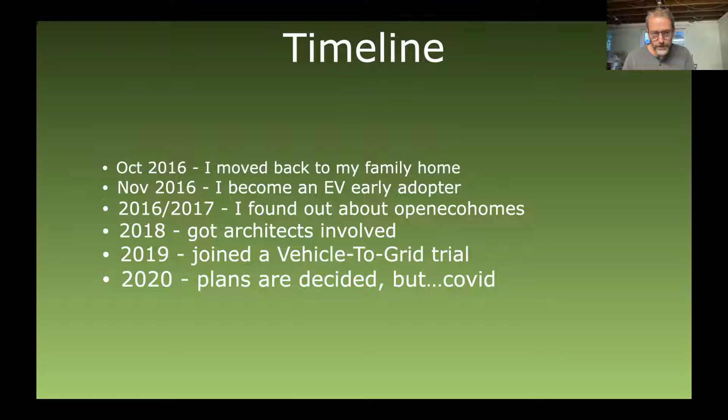By 2020, the plans are pretty finalised and the main eco and energy efficiency measures are decided upon. Then the world imploded with COVID. But having already planned the eco and energy efficiency measures, I was able to make use of the Green Homes Grant before it ended in 2021 in getting my pitched roof insulated with spray foam.

Having gone through the planning stages, I knew that it could be done independently of any of the other measures. So it was great to have that knowledge in place and knowing what I could move on and what I really couldn't. And equally, when the Solar Together group put a group purchasing leaflet through the door, again, I knew I could proceed with that. And with Solar Together, I reckon I got close to a 50% discount on the standard prices for solar.

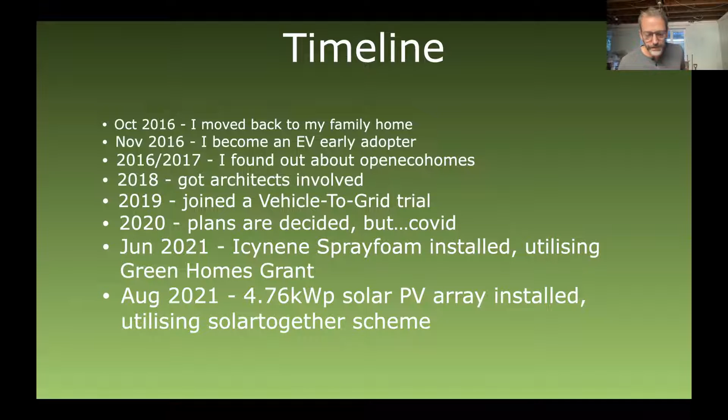And again, December 2021, when the government announced the end of the Renewable Heat Incentive, I decided to push for an install before that scheme ended, as replacement schemes generally are never as good. At that time, the Boiler Upgrade Scheme had not yet been announced. But it turned out I was right. The next scheme wasn't quite as good.

But pushing for an early install when there were supply chain issues with all of the COVID problems wasn't such a great idea. And at that time, my knowledge of heat pumps wasn't great.

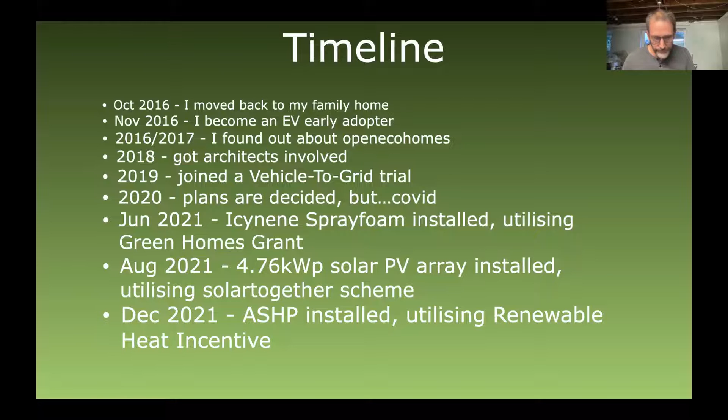Then, end of the lockdown, cometh the man, this time my builder buddy, saying that he was available to start on the project. And it was just absolutely perfect timing, being the end of spring, start of summer, just the perfect time of year. We couldn't have asked for a better gift.

And 5 months into the project now, I think he's pretty much still a buddy, thanks to him making a lot of allowances almost daily and very much tolerating myself and my mum. 5 months might sound like quite a long time, but we did encounter a lot of problems upstairs, and he's only been working 4 days a week with a minimal crew, which has really been just the right pace for mum to cope with the changes that are taking place, and a house not being overrun with builders, because we decided, well, I decided that moving out would not be the best option for her. It would be harder for her to cope with everything going on if she was away from her house, and especially away from her garden.

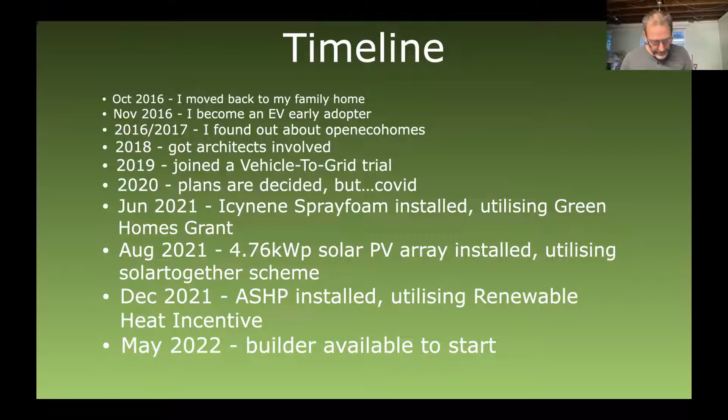So there are 3 main aims or main objectives to my project, which I'll describe in more detail with a section of the talk on each of them. The first one being considered quality of living design, being eco-friendly and energy efficient.

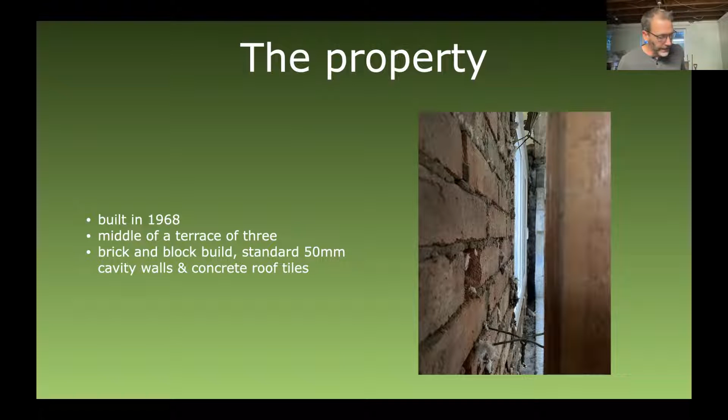So the property is a standard brick and block build with 50mm cavities, and you can just see in the cavity between the walls some of the blown fibre insulation that went into the cavity walls about 10 years ago. The existing layout now with the front extension was designed as a starter family home with 2 double bedrooms, 2 single bedrooms, and a kitchen with the obligatory serving hatch through to the living/dining area. My parents added the front extension in the 70s to add a downstairs toilet, dining room, and creating a double length garage that you can't even drive a small family car into these days. Of note is the passageway here on the right of the ground floor, because that's our only access through to the back garden.

So changing the layout I had to take into some considerations for mum, as elements of the living room downstairs and definitely her bedroom upstairs needed to remain unchanged to keep an element of familiarity, grounding her and really keeping alive the links to the building that she's spent her life in and raised a family in. So downstairs, the passageway through from the front to the rear gardens had to stay, the living room area, and keeping a front part of the garage for storage, and then upstairs, her bedroom.

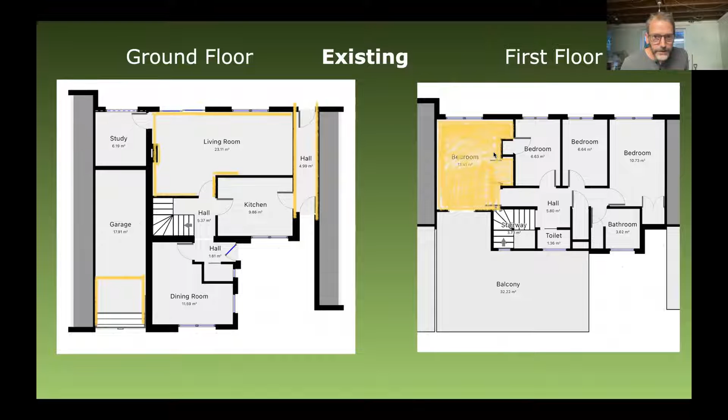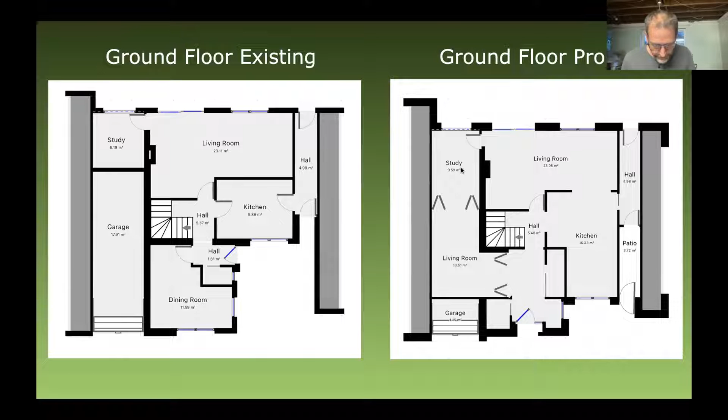So for the changes, the front door was moved to the front of the property, which seemed like a smart idea. I've extended the kitchen slightly. The dining and the garage were combined to create a new social area for myself, and we expanded the downstairs toilet to become a downstairs bathroom, with an area of the new social area that could be used as a downstairs bedroom with a view out into the garden, should either of us become unable to use the stairs.

Upstairs, we combined the 2 single bedrooms into a double bedroom, and I borrowed some of that space for the bedroom to the right, as the wardrobe in that room was used to house the air source heat pump's internal gubbins and the water cylinder. The bathroom has been pretty much doubled in size by knocking through what was a laundry cupboard and a separate shower room. So that's been quite a major change to the bathroom.

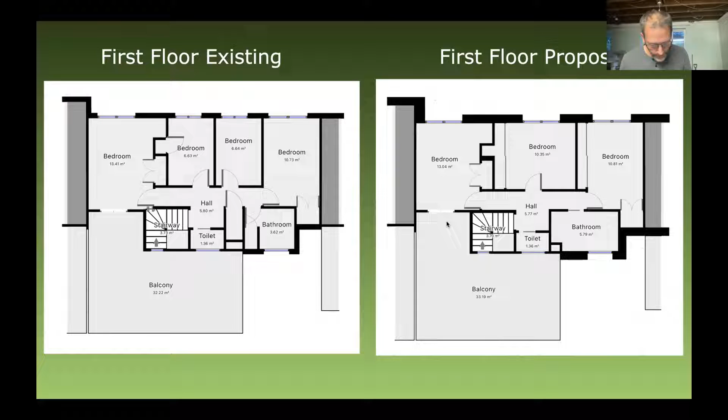The first project aim, considered quality of living design, might sound impressive, but it's a phrase I composed with the help of a thesaurus. Then the following day, I saw it in a magazine and realised that I'd probably seen it before somewhere, so I can't take any credit for that.

Basically, what I was trying to get with the phrase is making the house easier and safer for us to live in, taking in some elements of universal living, which is making it full wheelchair access. We can't do that, but we've kept wheelchair access in mind, and also dementia awareness, which includes recommendations such as keeping recognisable features of the house and belongings, pronounced skirting boards, so you can easily see where the wall and the floor join, and trying to avoid any changes from light to dark flooring, say with a very dark doormat on a light floor, because to somebody with dementia it can appear as a hole and can be quite frightening for them.

Also with the front door, making it same level access and providing a bench or shelf inside and outside the front door for putting bags down on, and creating a covered porch area so you don't get soaked while searching for a key, a toilet within easy reach of the front door, and certain elements of the house can be automated, such as door unlocking and lights turning on automatically.

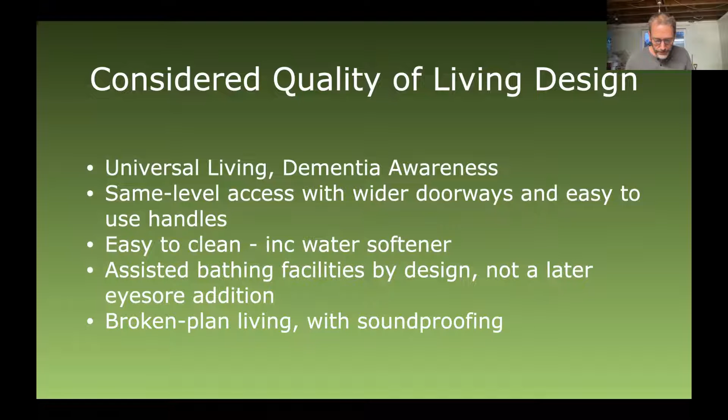Broken plan living with soundproofing. So some areas can be shut off by folding and sliding doors, and using soft materials to dampen sound as well. Okay, air quality, ventilation, and lower VOCs, volatile organic compounds. They have less if you use natural products.

Comfortable environment. As we both spend the majority of the day at home, an air source heat pump by design creates a comfortable environment by running all day, instead of gas heating that only comes on twice a day. Now, most people would think that external wall insulation is to insulate in the winter, but it also does the same job in the summer, providing cooler shelter from the oppressive heat we've been and will continue to experience.

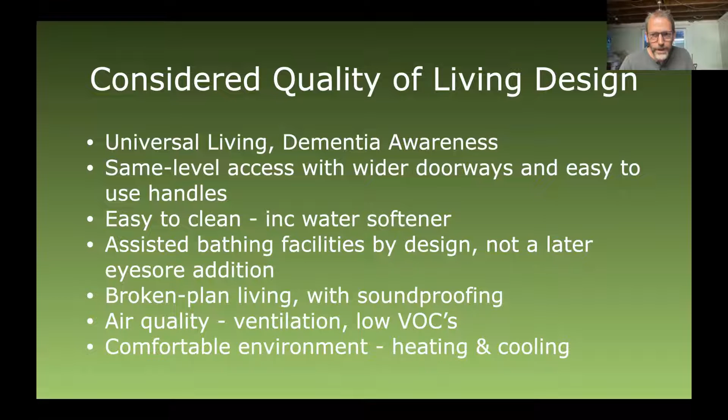And perhaps the best way to sum this up is to show you all a video of the not quite finished bathroom. And hopefully I can get this to run. So there's a pocket door to create the room with an easy to use lock, which was quite hard to find. Our washing machine has been temporarily plumbed into where, hopefully for health benefits, we can put an infrared sauna if there's some money left over in the budget.

Well, we seem to have lost the video. Because it's lost the video.

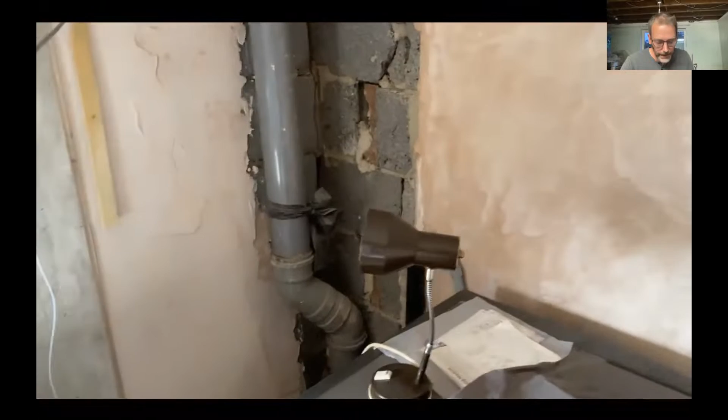Okay. So the corner section by the waste pipe that's coming up is an area that's going to be boxed off and will house the extract unit for all of the wet rooms. There's coming up a sink without a ridge so that it's easy to put things down, an ergonomic tap so that it's comfortable to use and easy to clean behind, which isn't a feature of our previous sinks.

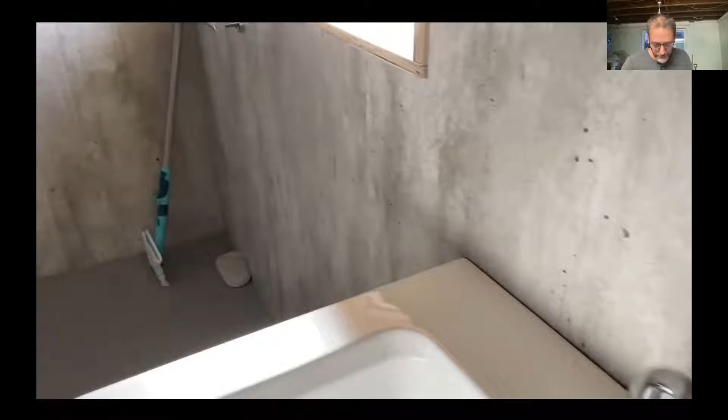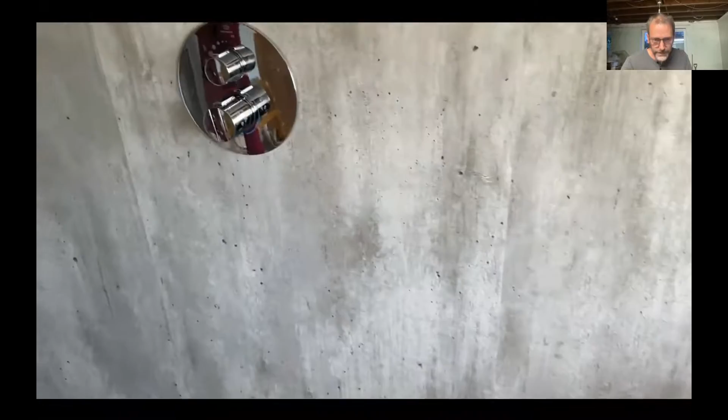The floor is Marmoleum, which is waterproof, comfortable, soft and warm. There's a grab rail cunningly disguised as a towel rail. The walls are covered in Mermaid boards, which are easy to clean and have no grubby grout. Again, an ergonomic tap without any prongs sticking out and situated so that you can turn the shower on without getting wet and getting that blast of cold water.

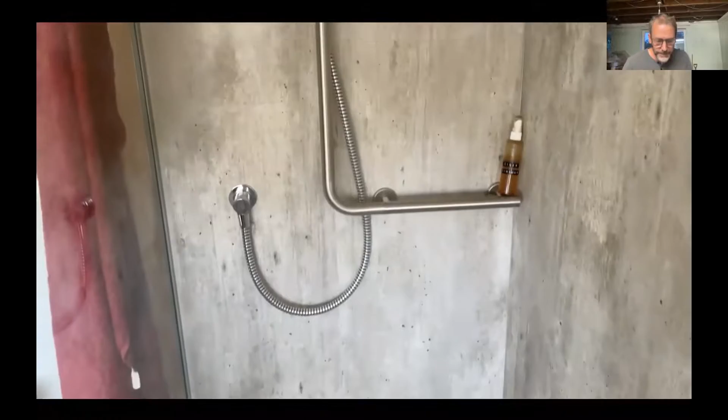And this is the 75% water saving shower head. It creates a drenching warm mist of water. So it's like a waterfall or rainforest shower, but without the associated environmental and financial costs. And as air source heat pumps aren't great as towel warmers, we also have an infrared heated towel rail, which got joined up to the electric circuit yesterday. So we've now got a warmer bathroom in the mornings.

I don't think we can see that. No, that's fine. Video has come to an end. Yeah. Right. It's the white panel, very bland at the moment. So on to the next slide.

Yep. So the second project aim was to be as eco-friendly as possible within our budget. What you may notice is that there are some elements of each aim that could be in any one of them. My original idea was not to extend at all, but we hadn't considered that our neighbours might want to build a 2-storey wraparound extension to the side and back, cutting off some of our light. So back to the drawing board and a bit more money on architects. And this is when I got AC Architects on board.

Using natural materials where possible, like cork and clay, and EWI, which stands for external wall insulation, which I'll go into more detail on in the third project aim.

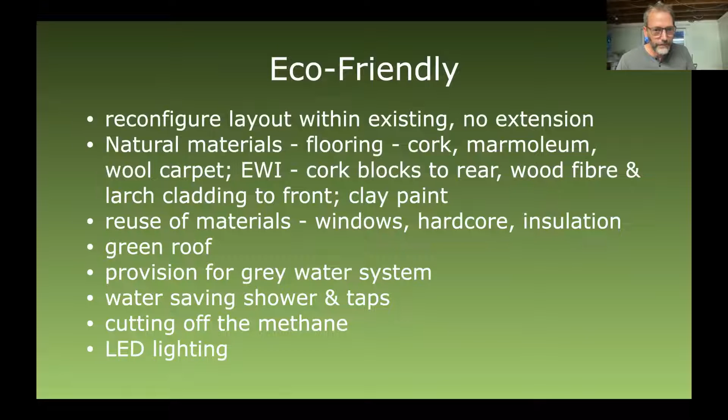10th of October, we are cutting off the methane, the so-called natural gas. That's going to be a very memorable day for me. Another eco-friendly thing, we're putting LED lighting throughout.

Now, with any eco or green measures, they will generally cost you more. So we had to compromise to keep within our budget. When you compromise, if what you choose instead doesn't match your ideals and values, then you're never going to be happy with it. It's just going to be a constant nagging reminder. And so always stick to your ideals and values. And it's a rule that you can apply to your job as well, I hear.

So here, as with this example, clay plaster, it's only twice the price of gypsum plaster, but the shipping costs just make it well out of our reach. So we opted for clay paint instead. So it has the same properties, but just in a much thinner layer.

Another compromise was the green roof. There are a number of different types of green roof. The one which replicates a ground level garden will obviously need a lot of structural support to be put in. So we chose to go with a cheaper sedum carpet, which also has the minimal maintenance to go with it.

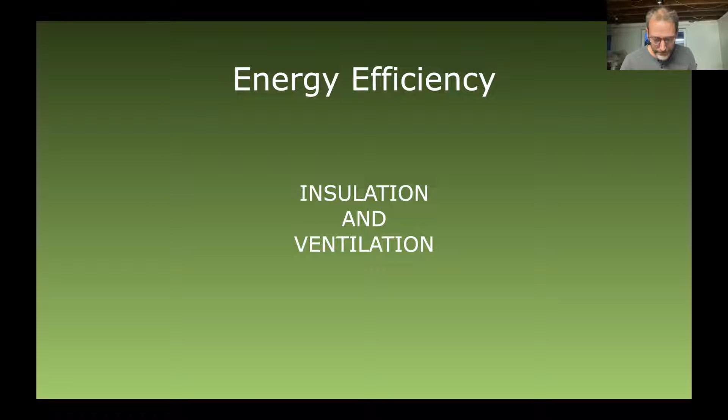So moving on to energy efficiency, the third and funnest of the project aims, where those who've been disappointed so far by a distinct lack of graphs will be rewarded with some. The main thing that I've learned from Open Eco Homes is that the two main considerations when altering your building are insulation and ventilation. Get these wrong and you can damage the fabric of your building. They're so important. They should be underlined in bold and in a red font color.

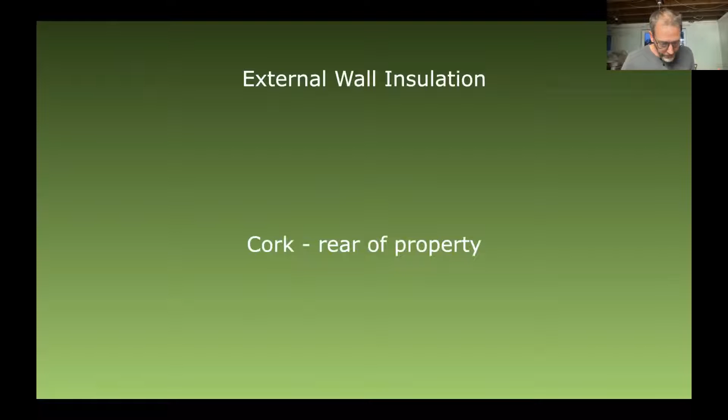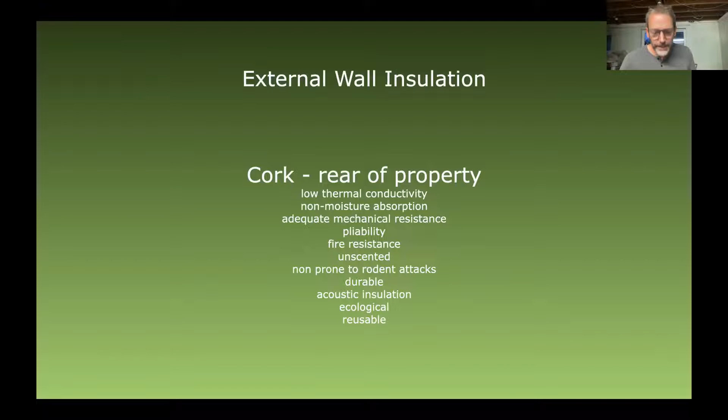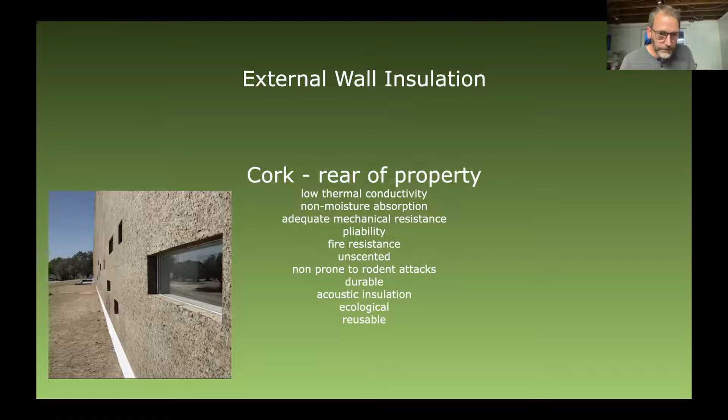So external wall insulation. I chose cork for the rear of the property because of its many properties, not least that it's a natural product and reusable. And I really like the look of it as well. It's available in a range of looks. The plain flat surface is what I like best. And it does retain that kind of natural color. Mostly there's a little bit of fading over the years, but not a drastic amount. And as well as the flat front, it's also available in a number of different patterns that they can cut into it as well.

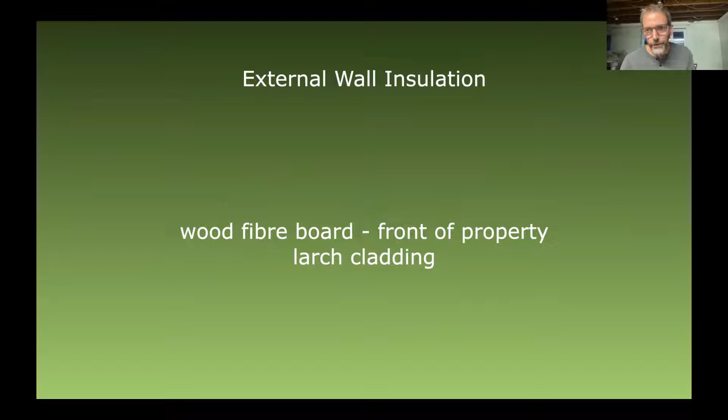For the front of the house, wood fibre board, again, a very eco-friendly natural product, covered with larch cladding, as I thought the planning department might struggle a bit with having cork on the front of the house as well. And again, I'm compromising here by going with Scottish larch as opposed to Siberian. It's generally considered not quite as good a quality. It's got more knots in it, but they add character, and it's got the same properties as the Siberian, but Siberian is generally ranked as better and longer lasting, but you're paying the price for that.

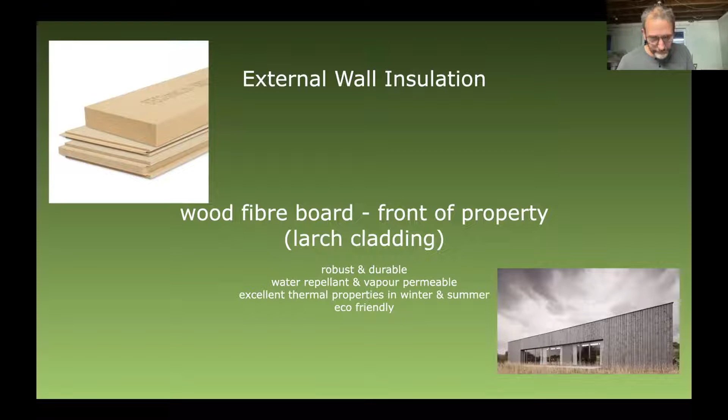So as I mentioned before, we're pulling the windows out to fit them into this new external wall insulation layer, as that will give them the best energy efficiency. The glazier that fitted them originally has come back and worked out a system with my builder that he was happy with, so that we could still keep the FENSA certification valid.

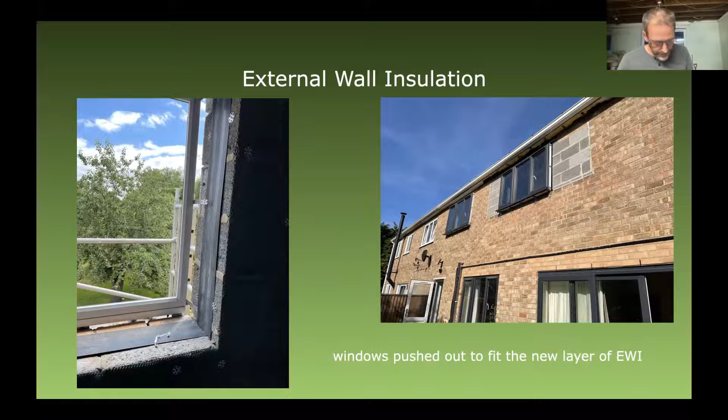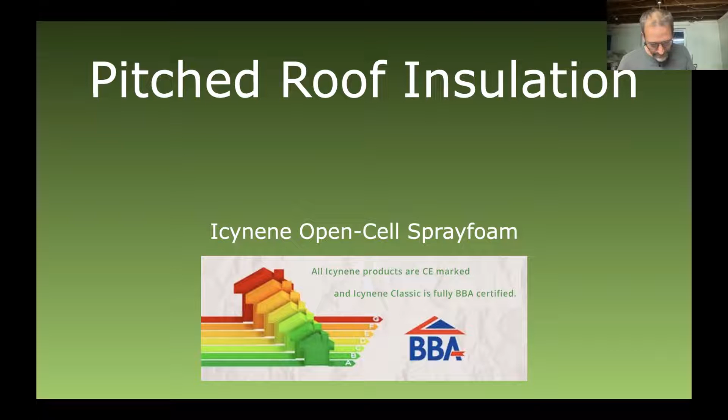breathable format. Mortgage providers don't like it because you can't see the health of the building fabric behind it, but you could say that the same goes for plaster and other insulation layers, and a quick lick of paint can hide many problems. So we got it through the Green Homes grant,

and so the government paid for it, but when it came time for having an energy performance certificate done, the chap doing that said that there isn't a box to tick for it, so it's not being calculated into your EPC. So even though the government was willing to pay for it, they can't account for it.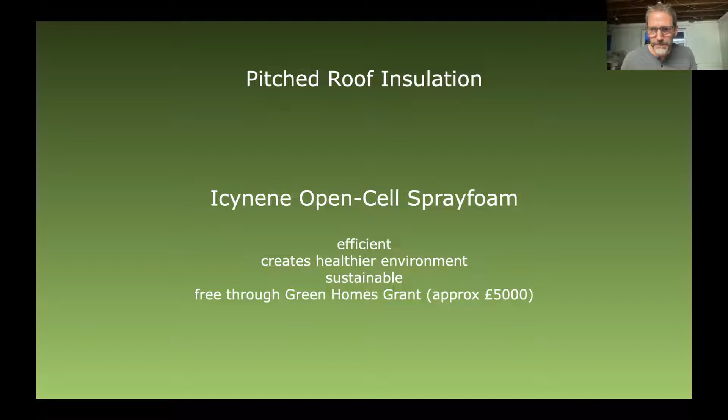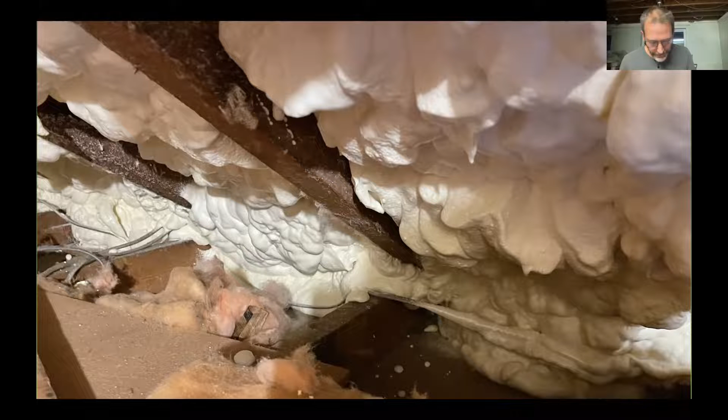But getting it through the grant probably explains why the quality of the install does leave a lot to be desired. There are kind of gaps in there, so it's not a consistent layer. It could have been applied a lot better, but it's up in the loft, and it's difficult for either of us to get up there and kind of check out the job that was done.

But with sensors up in the loft space, it's shown that the humidity and temperature has remained relatively constant. In July 2021, we had a heat wave, and that accounts for the spike in the temperature here. This year, when we had the solar panels providing the roof with shade, it was much cooler, but the sensors weren't in place due to the building work.

In the colder month of January of this year, the levels remained more constant, even though at the time our then shower room was expelling the warm, moist air directly into the loft cavity. So there were daily mini spikes, but overall, as you can see here, the open cell spray foam has worked, and it's keeping it at a very good level of humidity, quite often lower than the rest of the house.

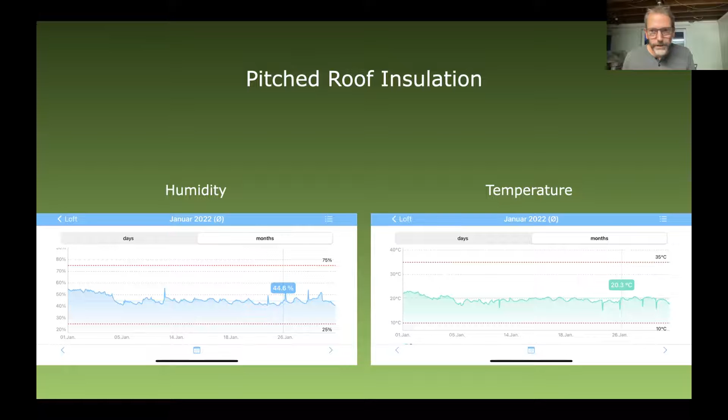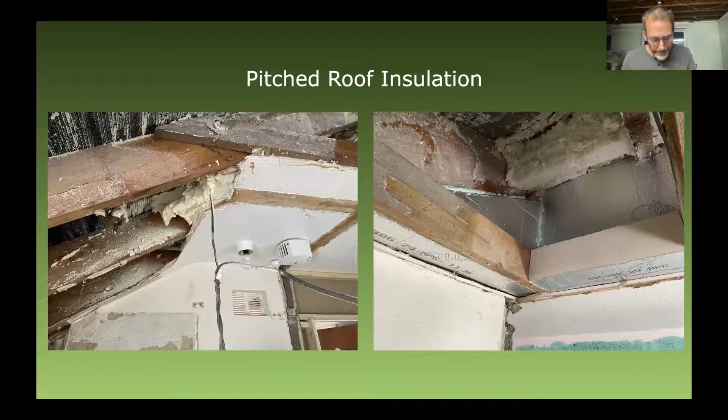With the spray foam, when it came to insulating the newly configured bathroom area, we had to create a junction between the warm roof that we'd created of the loft space and the cold roof of the bathroom, which has the skeeling, which is the slant, where the roof becomes part of the ceiling of the room. So warm and cold roofs. So the architect and the builder came up with the system to allow for combining the two and allowing for ventilation of the cold roof.

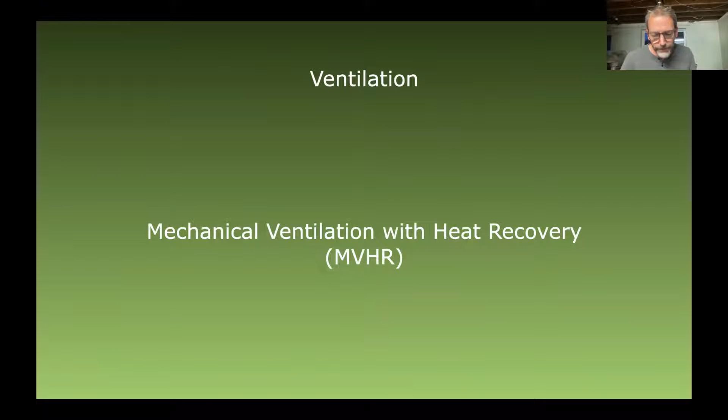The ventilation, the other main aspect of the insulation and ventilation that Open Eco Homes advise. Mechanical ventilation with heat recovery is by far the best option, and I would have had it if I could, but it's costly and requires ducting to most rooms, which is really quite invasive. And so luckily, Open Eco Homes produced a video in a recent year about an Aereco product for mechanical extract ventilation or demand control ventilation.

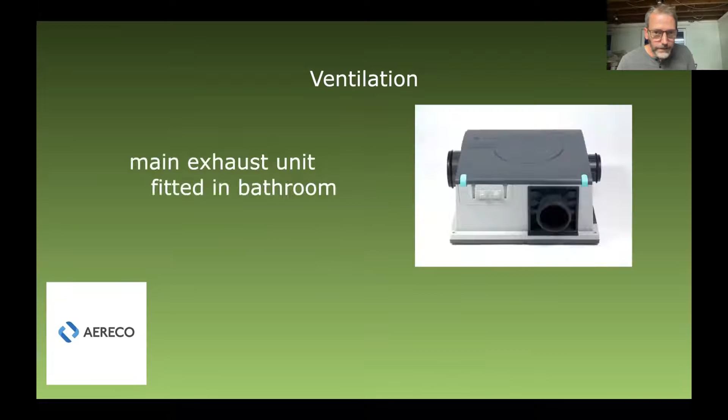So there's just a few pictures that I'd prepared of all the bits you get. So with solar, photovoltaic solar panels, I went through the Solar Together scheme, which was a very good option for bulk buying as a group, where you get the good discounts. And they also allowed you to purchase batteries at the same time.

And if anyone is thinking of installing solar, I always emphasize that you get your money back through storing the electricity and using it yourself, generally not through exporting. And as we move to more time of use tariffs, this becomes ever more important and effective at reducing our energy bills. Now, as I already had a battery on wheels, I didn't consider that getting a battery was essential for my project.

And with the production of solar, of course, you get more energy in the summer when you're using less. And then in the winter, December of 2021, I barely produced enough to fill my car battery, unfortunately.

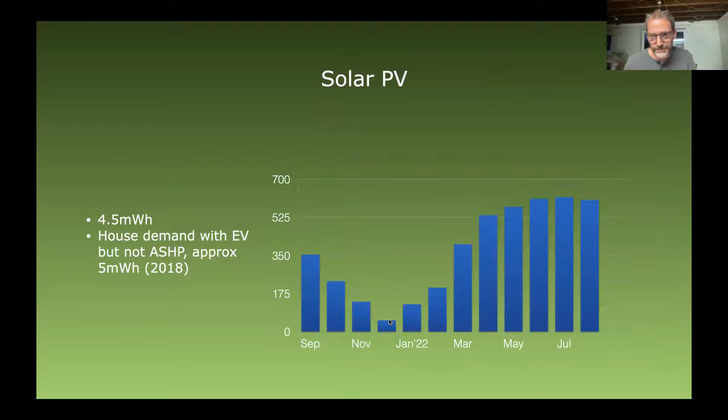So, air source heat pump. Our combi boiler was in good working condition and didn't necessarily need replacing, but because of the work we were doing ripping the house apart, it really made sense to install one now rather than wait a few years till the combi boiler broke, and the laws may by then have changed so you can't reinstall one, and at that point have to rip our house apart again.

I can see one face laughing, so I shall move on now.

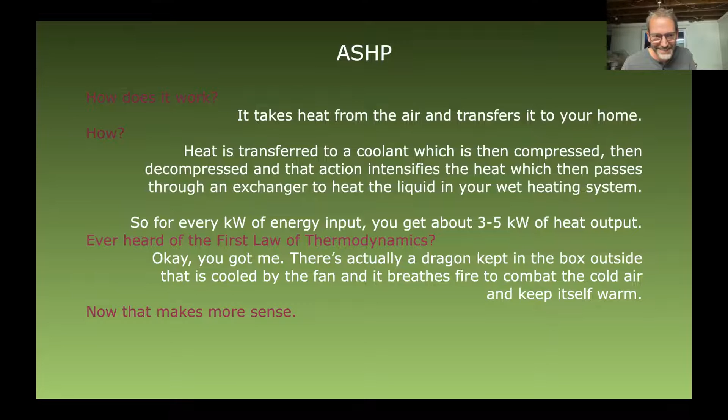So with an air source heat pump, you get a big ugly box with a fan and compressor. So you're swapping one form of pollution for another. Though most compressors do operate below 50 decibels, so you can have a normal conversation when you're standing next to one. It's not that much of an issue. You need an area outside to put your great big box. If it's at the front of the property, you might need planning permission.

And the heat pump needs a power supply feed from the fuse box and consumer units, and an entry point for the pipes near where the internal gubbins will be installed. The pipes you can see going up the side of the house here, they were then insulated, but they will eventually be covered by our external wall insulation as well.

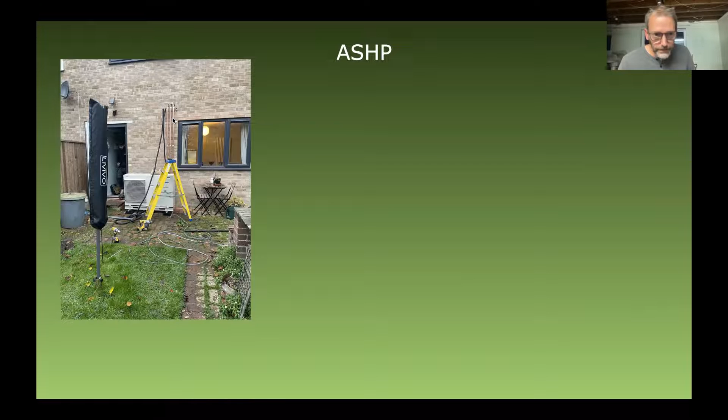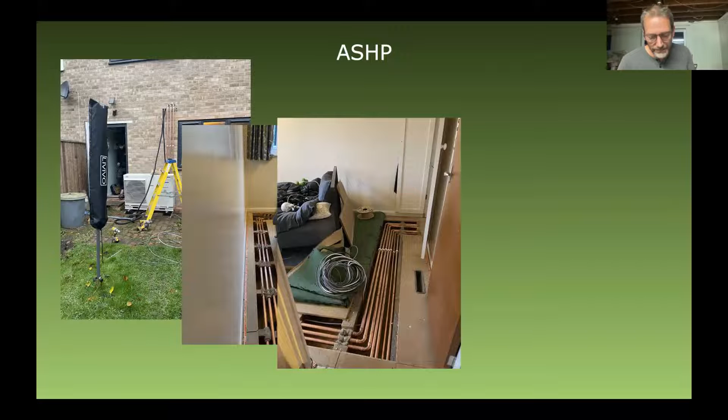So the pipes coming in between the floors and feeding through, in this case, my bedroom, weren't insulated, which will, I think, become a required standard. But this meant that my bedroom had underfloor heating as well as a radiator, which doesn't make it so comfortable for me because I do prefer a colder bedroom.

This is the wardrobe in my bedroom that I sacrificed, knowing that in hopefully months or years, I would be taking space from the adjoining single bedroom to create myself a new larger wardrobe. So knowing those plans, I was able to go ahead confidently with the installation. And I wanted to keep everything out of the bathroom. I could have used the linen cupboard maybe, but I wanted to create more space in the bathroom. So taking this wardrobe seemed like a very good idea.

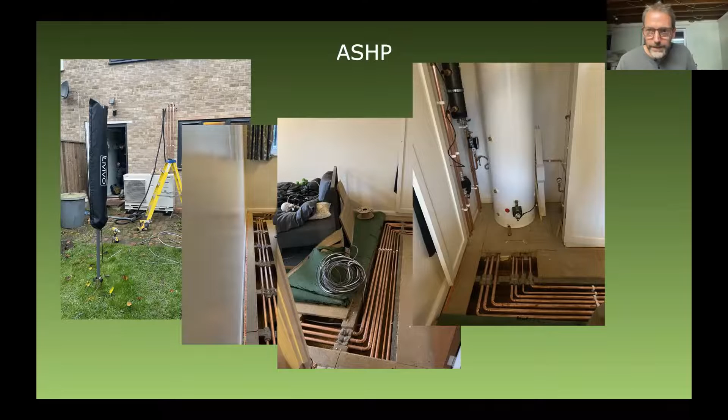Sorry, Paul, what is that white tank thing? White thing? Yeah. It's a Mixergy tank. Hold your horses, it's coming up.

So Mixergy tanks, I first heard about these on the YouTube channel Fully Charged, and they are brilliant. They can heat from a variety of sources, from your solar PV that's diverted, from mains electric or gas, and from a heat pump, and you can choose primary and secondary sources as well. And it heats the water from the top. So apart from when it's doing it from the heat pump, when it needs to heat the whole tank, any other source, it can heat from the top.

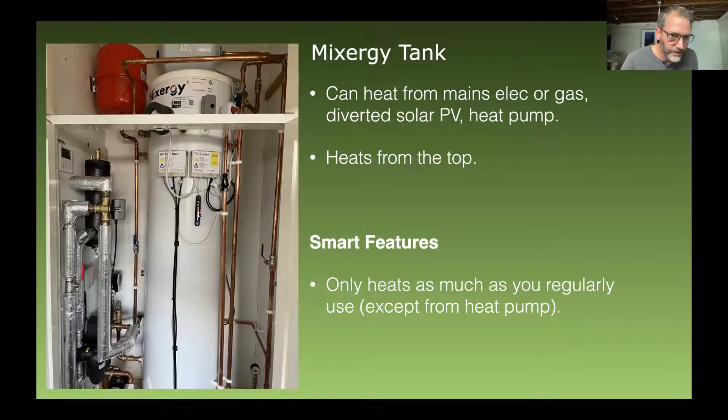And the physics of water mean that there's a natural layer between the hot and the cold water, so it's not cooling down as much, and there are smart features incorporated into it, so you're only heating as much as you regularly use. You can override that if you've got someone staying. You can say, okay, I want to increase the level of water in the tank. There's a little display here which shows that tank there is about 80–90% full at the time, and you can manually override, but it automatically assesses how much you regularly use, and it can link up to time of use tariffs such as the Octopus Agile.

So if there is a time when energy is a lot cheaper, it might take use of that and fill up the hot water cylinder fully, so you're getting your hot water at the cheapest possible price.

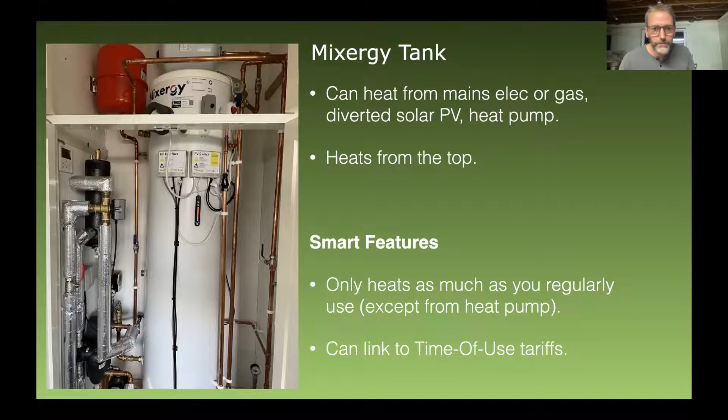Now, one of my glamorous assistants should be providing a link in the chat to these information sources I'm now going to mention. The Fully Charged show, which is where I heard about this Mixergy tank. Oh, and the Mixergy, I'm going to get my teeth back in. The Mixergy tank was the first install of it that my air source heat pump installers had ever done. So they are quite new to the market.

Another good source of information about heating is the Heat Geek channel. Everything you need to know about heat pumps and more. So if you're still running a gas boiler, there are videos about how to maximize your heating efficiency, which can give you an indication of how viable your house is for running a heat pump. So those are two sources of information; it's good fun to watch those.

So with the heat pump, this graph shows last December when it was installed on the second week of December, and it was actually turned on on the 14th of December. The green is showing my electricity kilowatt hours used per day. The grey is for gas. The blue line is the outside temperature minimum, and the red line shows the outside temperature maximum for that day.

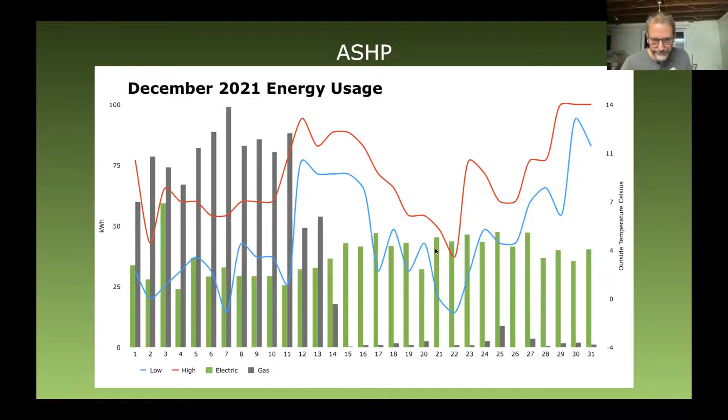So now we're on to the really exciting stuff, as there's so much potential to these concepts.

Are we nearly done, Paul? Because it's 1:45. Okay, I will speed it up. Sorry. No, I mean, another 3 or 4 minutes is fine.

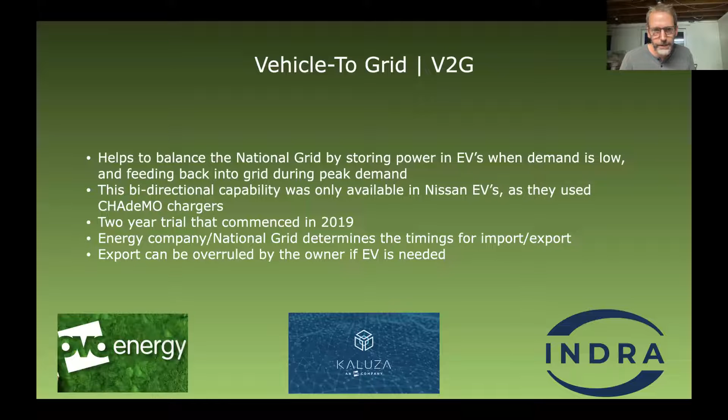Okay. So the idea of vehicle to grid is that you're helping to balance the national grid by storing power in your EV when there's low demand on the grid, and then feeding it back into the grid during peak demand. And it's the national grid and your energy company that are in control of these import and export times. So there's very little that you actually need to do. You can take over control of the vehicle. If you normally go out to work, you can set a minimum charge and a time of departure every day. So your vehicle will have enough battery charge for you, and it restricts the discharge on the battery. It won't export below 25%, and it won't fill up the battery higher than 90 to 95%, and that keeps the battery healthy.

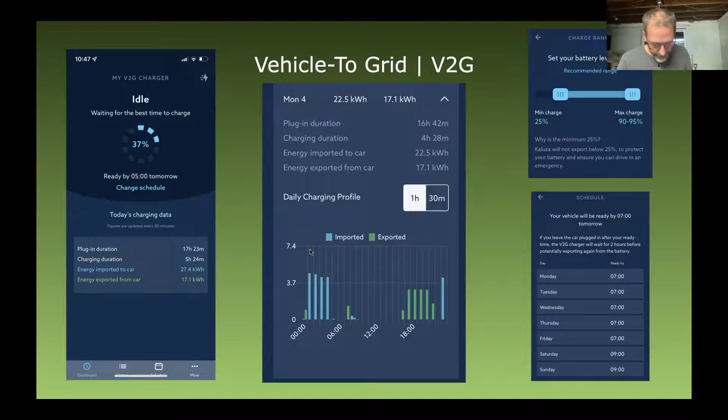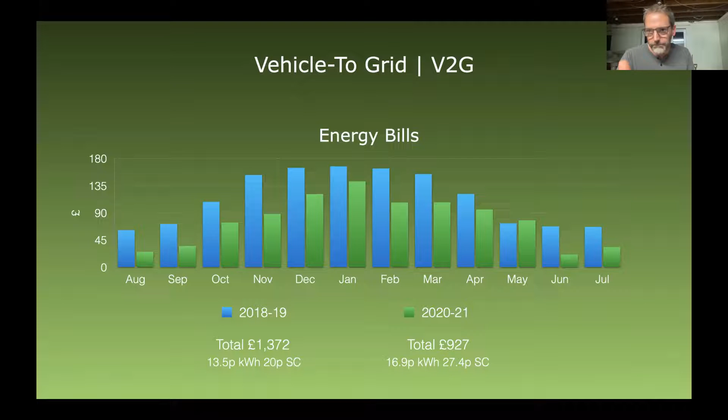So energy bills. This was the year before I started the vehicle to grid trial, and I had an electric vehicle, but I didn't have solar photovoltaic panels, and this is the electricity and gas combined. So total for that year, August to July, 1,372, 13 pence a kilowatt with a 20 pence per day standing charge. Moving on to 2020 to 21, that's a year on the trial, but I don't have any solar. The total has gone down to 927, and the pence per kilowatt and daily standing charges have gone up. So it's indicating that I'm saving a fair bit of money through the vehicle to grid trial at that point.

Then we move on to 2021 to 22, and this is when I've got the solar panels installed. And during that 12 months, the energy company paid me £459. That's a negative energy bill, which, considering the crisis we're going through at the moment, I consider myself extremely lucky.

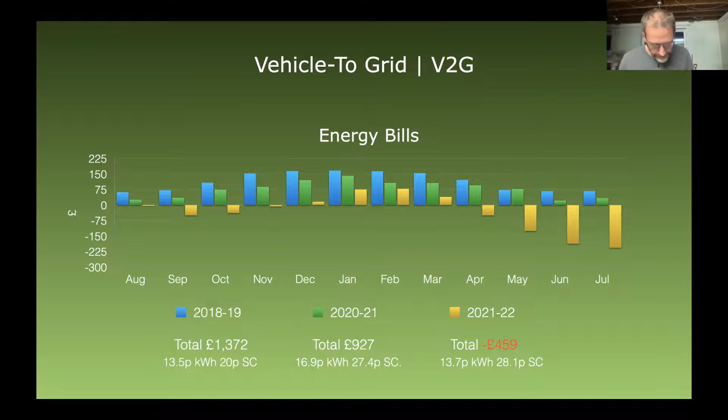Now, I've had a great time doing loads of media for OVO and for the other companies involved, getting myself in the Sunday Times and Bloomberg, but they haven't given us any guarantees on what's going to be happening post December of this year. So because of the energy crisis and the unsure position that everybody's in, I chose to move over to a new trial, which is vehicle to home, where instead of the energy company or the national grid having control, the user has control of the energy. And the idea is that you fill your battery up from solar, or if there's not enough solar, you can top it up from an overnight rate, and then you run your house for the rest of the day using that much cheaper electricity, avoiding the peak rates of the day.

Can't tell you much about it because I've only been on this trial for a few weeks. The trial itself starts in a few months' time. It's still open for applications this month.

Right, air source heat pump problems. We'd chosen an early installation to take advantage of the heat incentive, but this led to us receiving a 9 kilowatt heat pump, which is at least 2 kilowatts oversized, and following the external wall insulation and the other measures, it's going to be grossly oversized. The information is, do not oversize your heat pump. This is going to create a few problems for us.

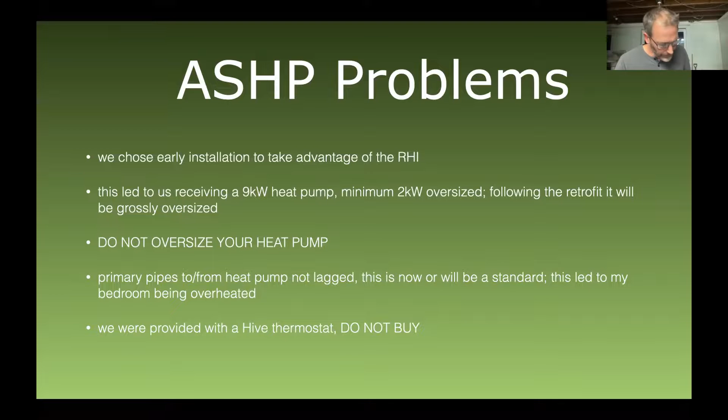On balance, my retrofit will be beneficial, but almost on a daily basis, I'm questioning the aggro that I'm putting my mum through to get us to that point. But fingers crossed, it'll be worth it. When should you retrofit? Our aim was to create a better quality of living for us, so the time is now. If you're doing it for ecological reasons, then it was 10 or more years ago to make the changes. If you're thinking about it for economic reasons, you can still make savings now, but if you're waiting for grants or the government to take the lead, yeah, good luck.

What benefits have we seen so far? Little, because we're really still in the middle of the retrofit. But if the rest of the retrofit realizes the intended benefits as we've got from the bathroom, the benefits will be immense. So my 3 tips, as mentioned on the handout: educate yourself. Retrofit still remains a niche area, and the suppliers and trades are not really ready for it. The tradespeople I've met have been really keen on using the new products and new techniques, because they normally don't get the chance to do it. So they're keen, and you can work on that, but generally the industry as a whole isn't ready.